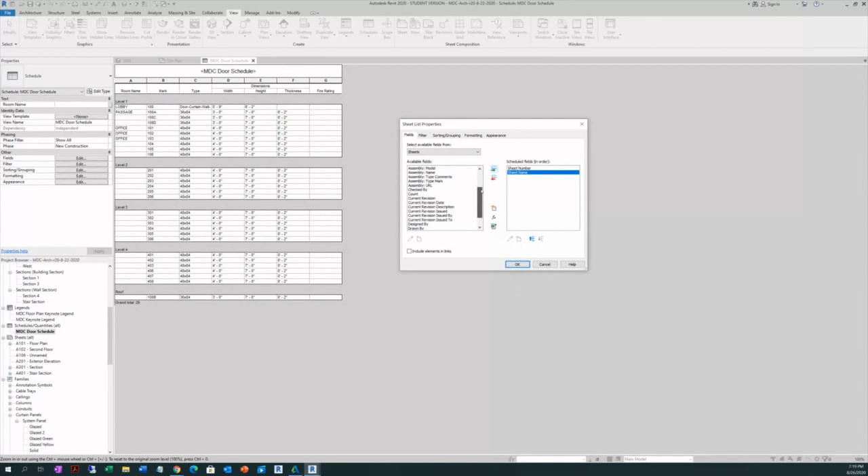For now, all these availables, I don't want to use. I want to create my parameter, my project parameter, okay? Now what I have, I'm going to click over here. So far we have this, correct, ladies? So far we have this, and that's what we have. You can increase this, the name, and have something like this. Are you with me on this?

Yes, okay, now look at here. I want you to save this. Okay, we have the sheet number and the sheet name. You can also change here the name, and you can put index of drawing, correct? Nothing happened. Now, let's say that you say, well, you know what, I need to have a complex index of drawings.

Let me open - no, I'm not going to open it, I'm going to keep it like that, simple. Let's say that we need to incorporate cover sheet, general notes. We need to also include the civil, life safety. We need to include also architectural, obviously, structural, and MEP - mechanical, electrical, and plumbing. And there are other ones that are not included, because you can have a pool consultant, interior designer, could be other disciplines, but let's keep it simple, right?

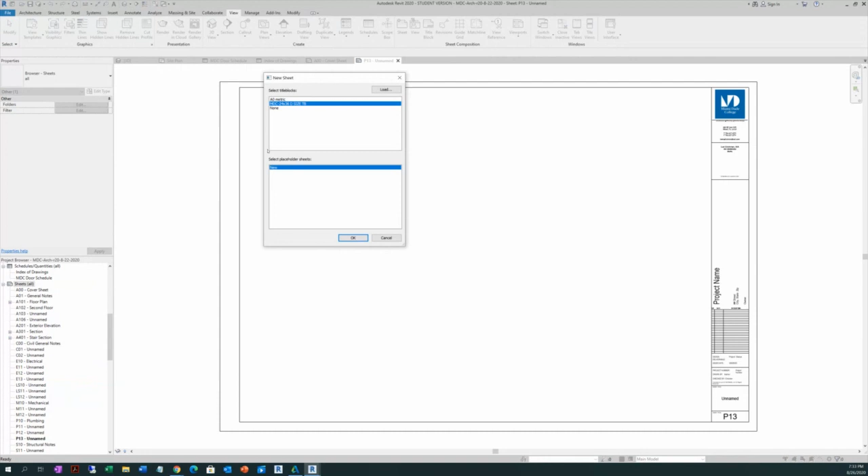What I need to do is this: I go ahead here in my project browser, correct? I can right click, new sheet. It's going to obviously get the last number that was done on the schedule, which is P something. I'm going to get here, correct? And it's going to ask me the title block. Yes, I say okay, but it's going to take me to P13, and that's not what I want, correct?

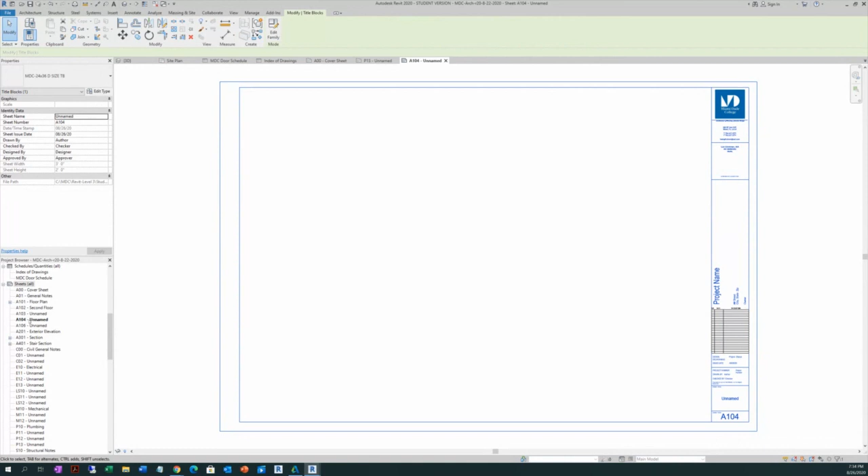So I come here, and then what I do is I click double on that sheet number, and I change it to A104. That's it. And then A104 will be here. Okay, now another situation I can approach is this.

You went here to, let's see, we were here, correct? Remember that we were here, correct? On your index of drawings? Yes. Then here you can come here, Haley and Rosa, insert data row. Yeah, but it's at the end.

The A104 that you create is at the end, it's not located in between on the index. Listen, you see on your project browser where it's located? Yes, it's located in the right position.

Okay, we are going to do the same here. Give me some time, give me some time that we are going to do it. Now, which sheet don't you have,

Rosa, that you said you are missing? A103, you don't have A103? Oh, okay, I have it here, okay. But I'm going to do it and check it out. Let me do this myself one second.

I don't have nothing there, I'm going to delete it. Okay, now perfect, I come back to my index of drawings, correct? Okay, you're in the index of drawings, what I want is to insert a data row again.

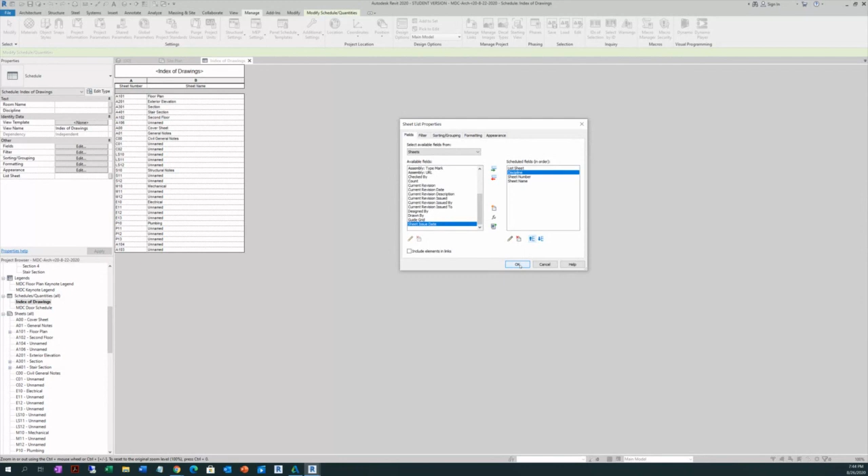Okay, now let's go here and click OK. This is what we have. Correct, ladies? Yes. That's okay.

Okay, so let's start with the sheet list. Who is coming first? Who is coming first will be the cover sheet and the general notes. So that will be over here, the A00 and the A01. So I go here and I look, and I'm going to enter 0. Then I'm going to enter 0 one more time in the other row, because it belongs to the cover sheet and general notes.

Then I'm going to, under discipline, I'm going to enter here, let's see, general. I'm going to enter general. Then I click away and I click again, and I can click and select general, okay? Because it's already typed in there for us to use. So far, so good, ladies?

Okay, now, after the cover sheet, comes the survey and all the description and all those things. But then also the civil, correct? So you locate where is the civil general notes, C00, C01. Then you are going to enter 1 and 1 for those civils, and there are 3 civil sheets. You have 3 civil sheets. Then under discipline, you are going to enter civil.

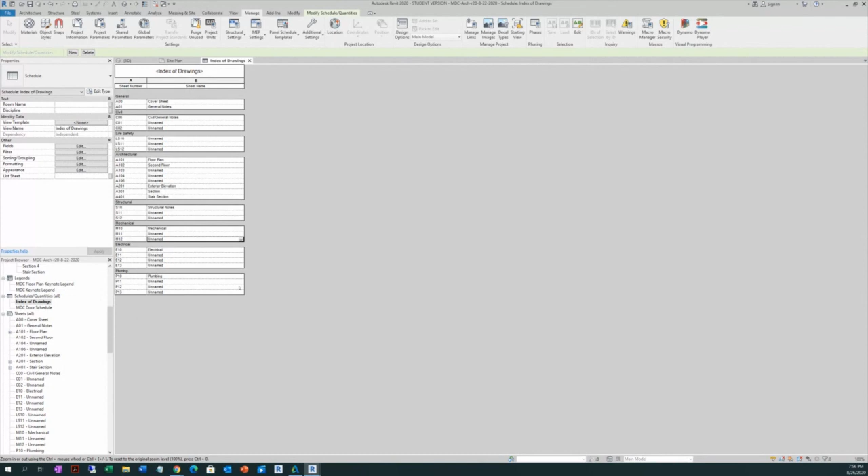If you want to enter a discipline, then you come here and sorting by grouping, by formatting, then you unhide it, sheet list and discipline, you work or you add whatever you need to add. Let's say that you need to add, tell me something, what discipline do you think that you need to add?

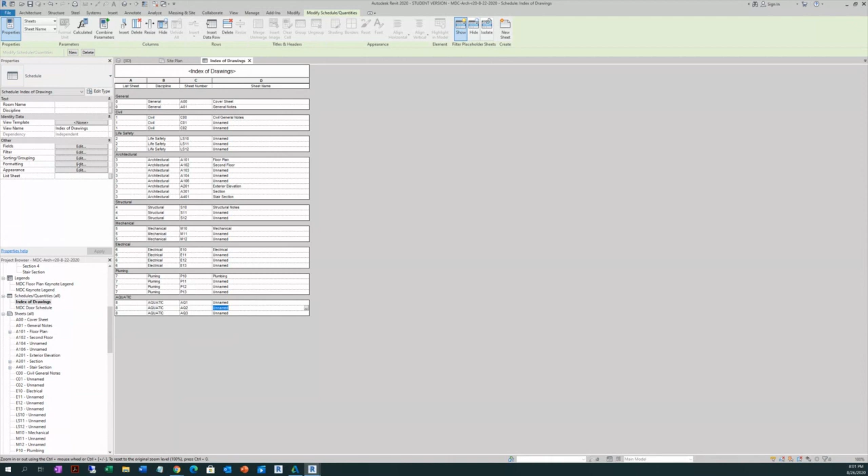Correct? Then you change the name of that sheet. It's AQ1, uppercase, AQ1, and then AQ2, which is the number of the sheet, AQ2, okay, and then AQ3, okay, that's it. Then one more time, you go here to formatting, you select sheet list, hidden field,

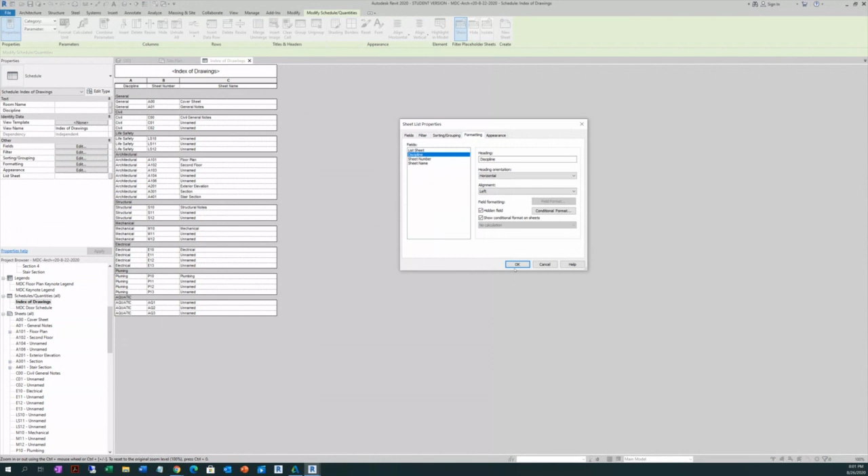you say okay, correct? Then you are going to do the same with discipline. Go back to formatting, select discipline and hidden field. And this is what you have. Okay, Haley? Rosa? Yes. Okay, so that could be a sheet index of drawings.

Now you can insert other fields, like for example, you have the fields here, edit fields. Then you can enter current revision. Let's see, current revision.

Then current date, current revision date. Okay, that's it, to keep it simple like that. Click over here. You have the current revision and the current revision date. It's always important with the dates. So you have something like that. You save it. Correct.

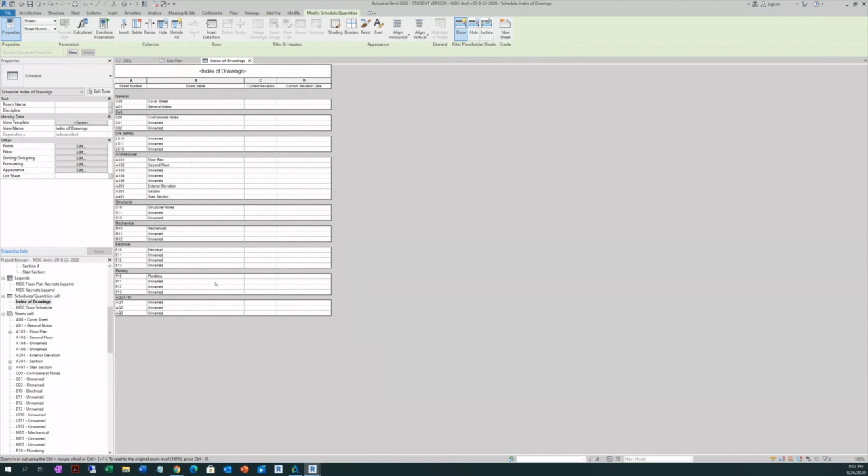Okay, now let's do something. Haley and Rosa, could you please share with me the index of drawings? I'm going to make moderator, participant, or presenter. Haley, I'm going to start with you, I have you here in the list. Presenter, please. Then Rosa. Let me turn down the lights in my house.

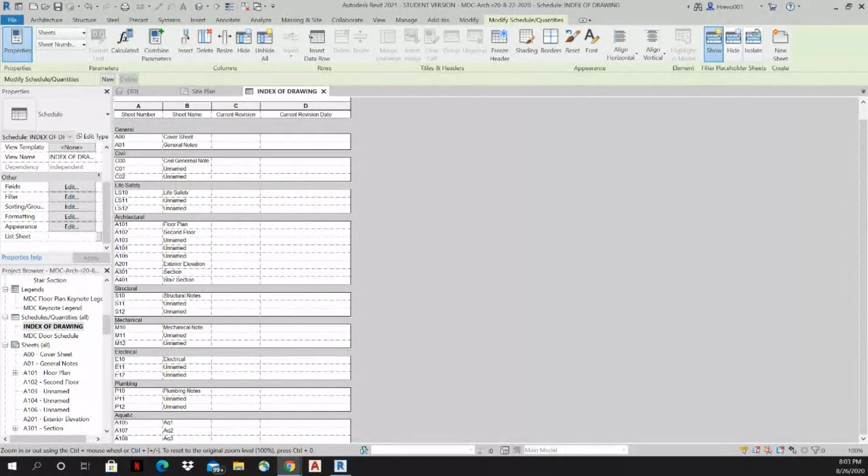Okay, let me see, Haley. Yeah, that's mine. Okay, wait, I want to see them. Okay excellent, see, save it and analyze it. Analyze it because that could be easy.

If you want, okay, we can insert, we can also insert the counting, because you want to know how many sheets you have in the project.

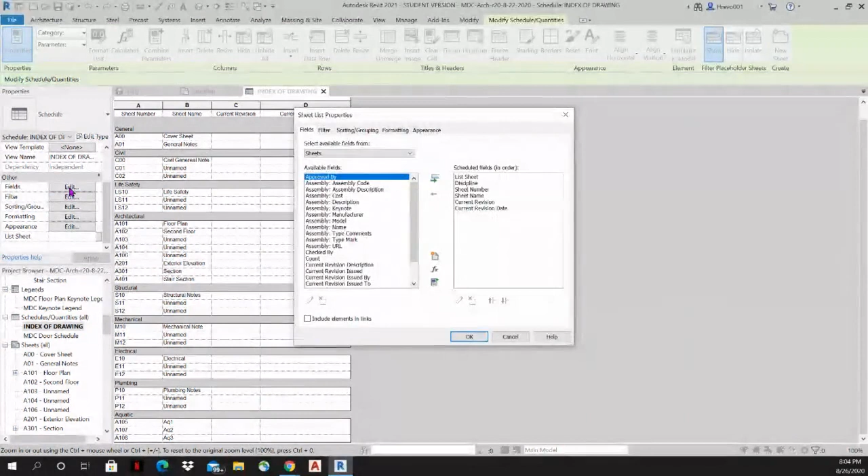You go back to the... Okay Haley, do me a favor, go to fields. And Rosa, go to fields. Click, go ahead, fields, click. Look over there, look for count. Yes, I'm going to do the same here. Look for count and enter count. Then you have count there, correct?

Now go back to fields, then go to sorting and grouping. In sorting and grouping I want you to check the itemize every instance, but click on grand totals. Grand totals. Okay, oh beautiful, and say okay, perfect.

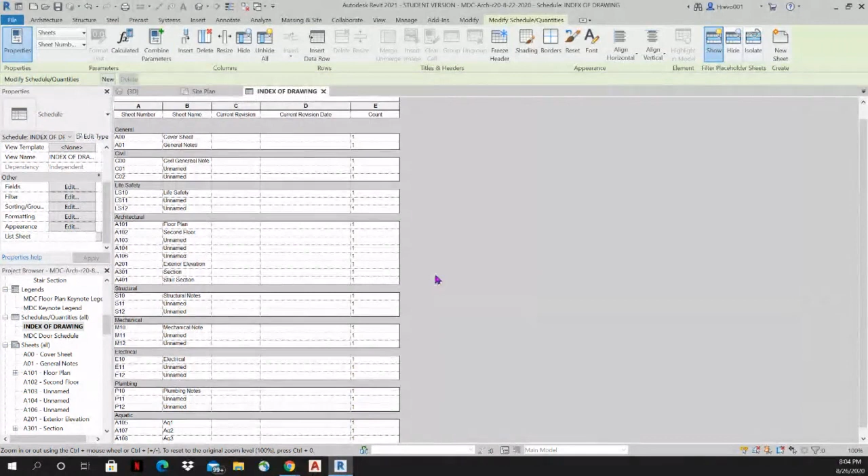So you have something like that. Now you see what the E column says? You see the E column? It says count, highlighted there. See, select E, drag it, the whole column. Excellent, and then try hitting on your ribbon, on your right side upper, which says show next to, hit it.

It should hit it. I don't want to see it, I don't want to hit it. Okay, oh no, go to the columns. I'm sorry, I apologize, on the left side. No, on the ribbon, on the left side, go to the right a little, hit it. No, the next one. Got it, hide column. You're doing the same that you did on formatting, the same as when you hit the list sheet for the discipline, the same you did it there, okay? But you have the counting now, okay.

Okay, thank you. Rosa, may you please show me what you have, please?

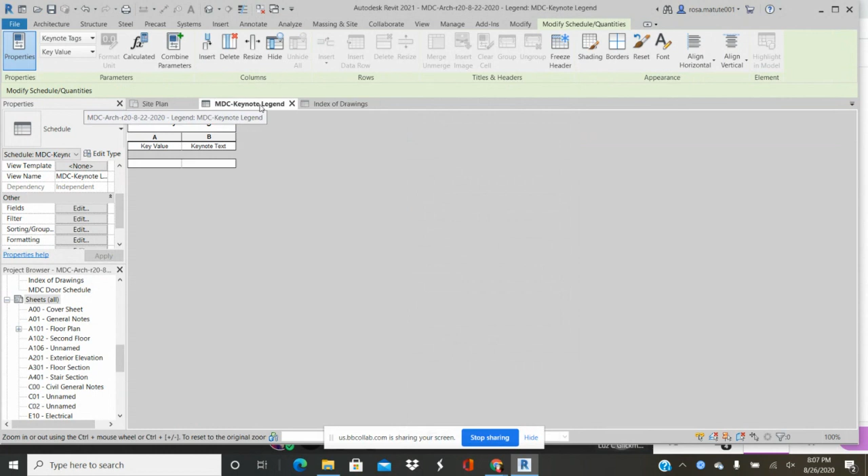Now let's do something quickly. Excuse me, Luz, please, if we have time at the end, remember that I couldn't do the keynote legend. Okay, I don't know why you cannot do it, but let's do something, Rosa.

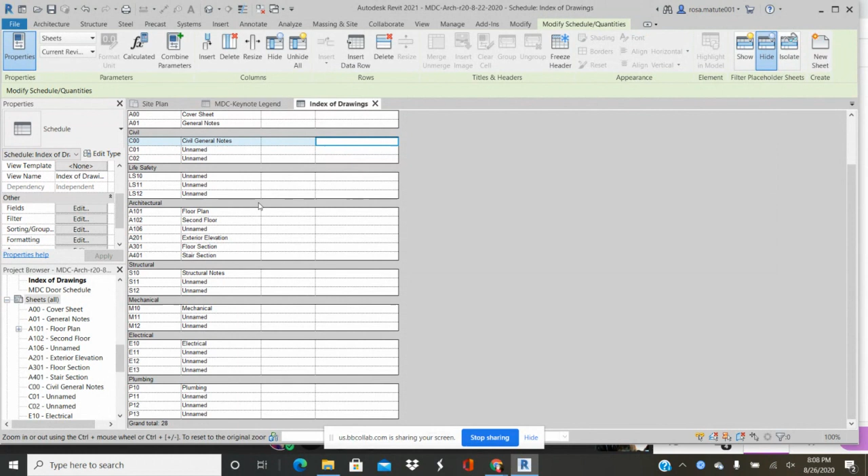I don't know if you have time, let's say, let's see, on Friday, at least one hour, or tomorrow, to go and see for the... let me see, let me go back and share. I know that you cannot, let's see, and if Haley can join us.

What I can do, let's do something. Next Wednesday we can recap whatever is included in the keynotes. Perfect, perfect, okay, for me it's perfect. If not Wednesday, let's do it for Tuesday. That's it, on Tuesday we can recap, that's the last class, then we can address that.

I'm going to send you a quick floor plan, two floor plan, two story, along with Haley. Have those notes ready, but I'm going to show you how you can do it using the notepad, the keynoting, okay? Because there's another way to do it with Excel sheets, and you bring it, but then you need to bring it to a CAD, and then you link the CAD file. Let's do it this way, I think it's better, okay? So let's continue, and Tuesday at this time make yourself available and we can go over the keynote, because I don't know why you cannot do the keynote.

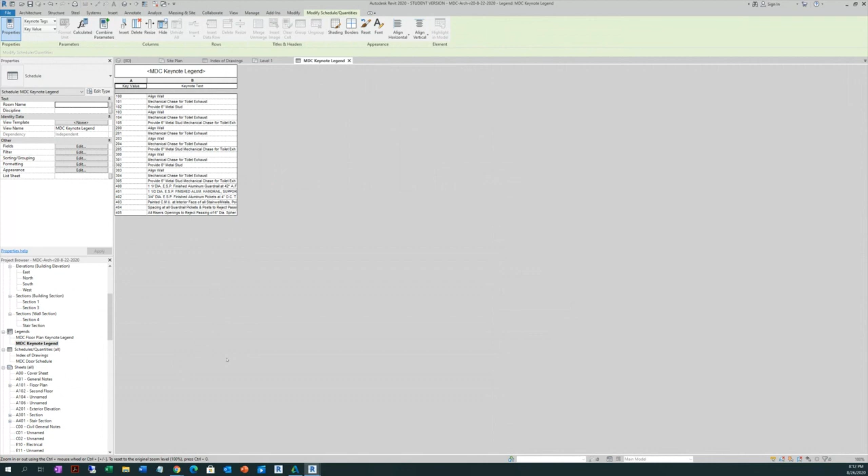Yes, without... yes, the keynote. Yes, but you have it now, but you didn't have it that day, correct? Correct. Okay, but let's be fair, let's go be fair.

Let's go do it on Tuesday, because I don't want to give you an easy task, because I know that you did it, but for some reason you were having the tags, but the schedule was not populated over here, correct? So if something's wrong there, let's go do it from scratch, okay? We are going to do it on Tuesday, okay?

So for me to explain to Haley and to you quickly how the use of the keynotes works: when you go to Notepad, to the Notepad, do this, and then bring it to your project, okay? So let's go, continue here.

On level 1, I want you to go back and level 1. In level 1, I want you to highlight it, right click, and say duplicate, but duplicate with detailing. Okay, do duplicate alone, duplicate view, duplicate alone. See, you don't have no notes, you don't have no tags, you don't have no dimensions.

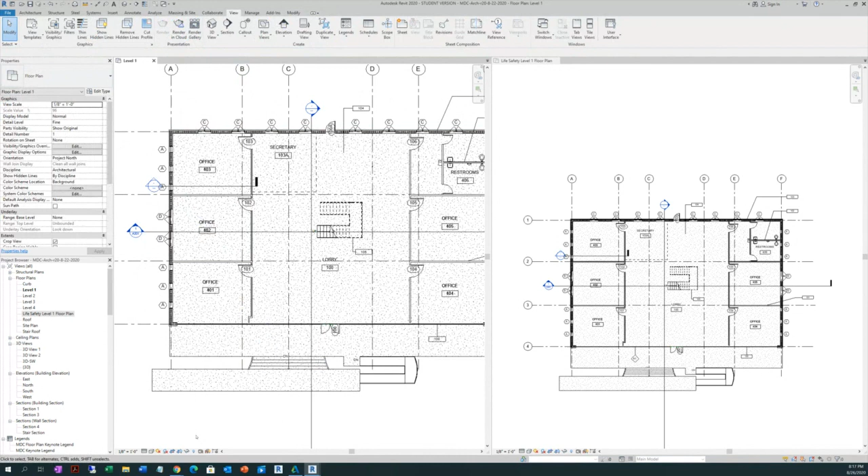Now you have your level 1 alone. Now you don't need to repeat. If I have my tags here, that's perfect. If I have my window tags and my door tag, beautiful. My room, eventually, of course. Then I'm going to delete. I'm going to delete from this level 1 only my wall types. I'm going to select this, the A1, and I'm going to delete it from there. I'm going to leave this alone. I should have my dimensions here, correct? Because this could be the dimension floor plan. Actually, this is the dimension floor plan.

Okay, so you come here on your new life safety level 1 floor plan. You come here on the life safety level floor plan, correct? Here you delete the tag one and then? That's it, okay, on your level 1, correct. Okay, what I'm insisting on this, Kaylee and Rosa, is because you show only one time the information. In this case over here, correct? Over here, I'm sorry, the window tag or the door tags.

So over here, you are going to only show what is life safety pertaining, what it belongs to life safety. That's it. So what you need to do in life safety level 1, select one of the window tags, right click. You are going to select all the instance in the view, not in the project, because if you select the project, it's going to select included here on level 1. You are going to select all instance visible in view, and this view where you are, life safety. Capiche? Everybody with me? Yeah, perfect. So you are going to delete it. Correct? Okay, so you don't need to show things twice because then you have to go and fix it.

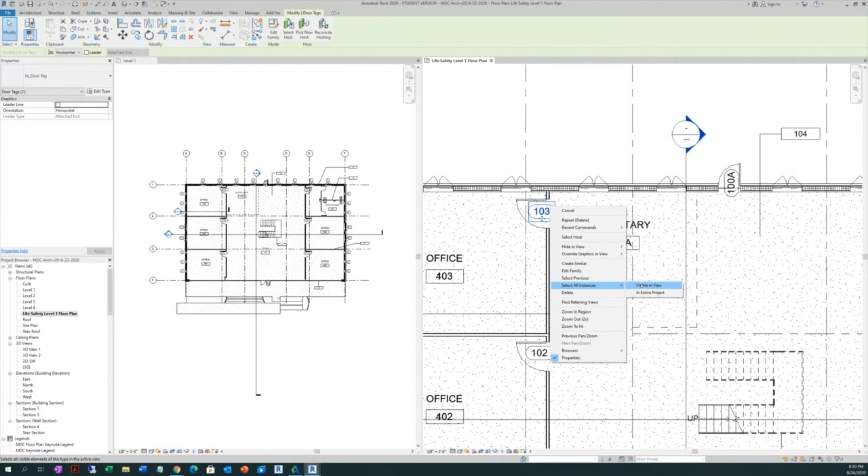Then you don't need either to show the door numbers. Select your door numbers. Make sure it's the door numbers tag. Right click, select all the instance visible in the view or in the project. Who can help me on that? Who can help me? It's going to be the view. Beautiful, excellent, I love it.

So you delete it. You have your doors number here, your window tag in there. You don't need to do it twice. You don't even need to hit it here. Don't do it, you don't need it. Honestly, don't hit it. You have it here, you have it here, but don't hit it here if you don't need it. Because somebody can do something, then the person doesn't know, it's going to populate this with that, no.

This is what it is. Okay, now let's say that we don't need even the tag. Select one of the tags, right click, select all the instance visible in the view and delete it. Okay?

Even the sections, but okay, let's leave it the sections. You can go ahead, right click, hide in view the element. Select the other section, click, hide in view the element. Why? If I come here, let's say I'm going to select this section and delete it, it's going to complain.

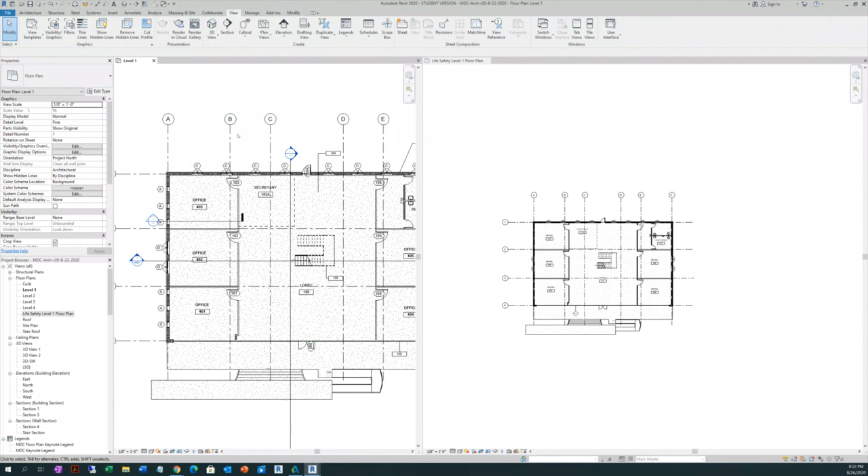Okay, now I have this, and let's go have some fun. I'm going to close level 1, and I'm going to teach you something. Okay, now we are on the life safety level 1 floor plan, correct? Okay, now

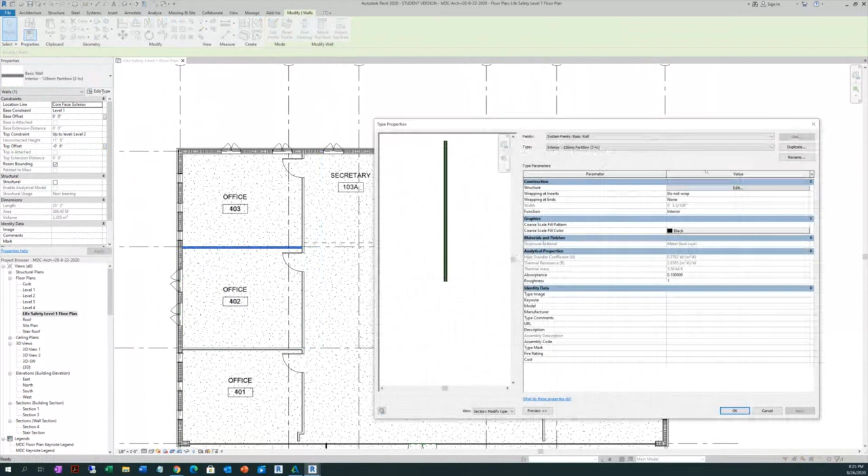Wait. Okay, select that one. So over here in edit type, I want to be consistent on my naming. So I'm going to duplicate, and I'm going to put here, let's say, MDC or 6 inches, space MDC, 2 hours. Okay, 2 hours, let's say 2 hours.

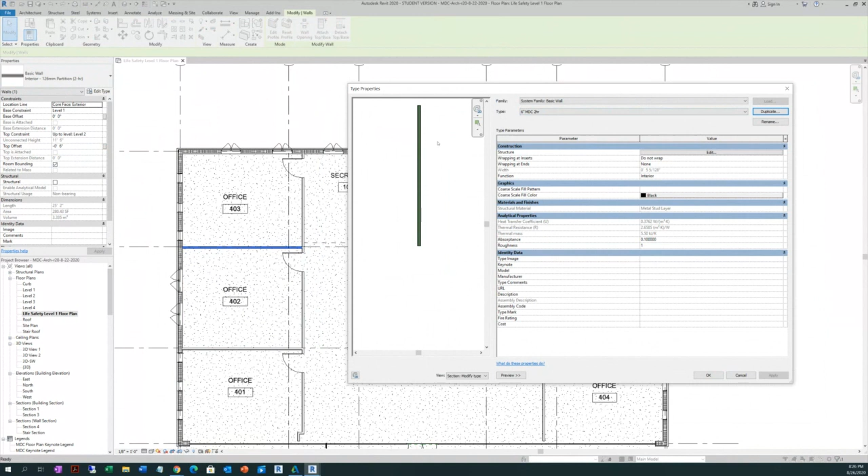Excuse me, Luz. I have a warning message here. But it lets you do it. Yes, okay. Leave it like that. So put - let's go put this 6 inches MDC 2 hours. Okay, or let's do it right. Let's do things properly. Forget it, let's cancel what we just did. Let's do things right.

Let's go do something. This wall and this wall is going to be 2 hour rating, period. What I'm going to do is, if I select this wall, I'm going to split it. Let's go do it quickly. Come here to modify. Let's go here and modify, then select split element.

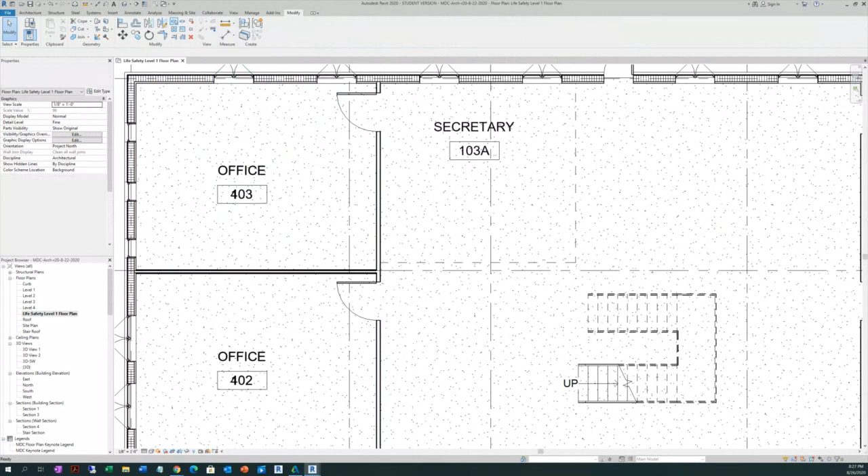Position yourself over here at this intersection between that vertical wall and the horizontal wall. Clear? Okay, so you have 2 walls there, correct? You have 2 walls there, right, ladies? 2 walls there. So let's go. Is everybody with me here?

Yes. Okay, Haley? Yes, yes, okay. We are going to create an 8 inches CMU wall here, period. That's it. How? Let's go here on architecture, let's go and wall. And wall, you go to the type selector and let's go locate the basic generic 8 inches MDC. You see here, wall generic 8 inches MDC. Click on that one.

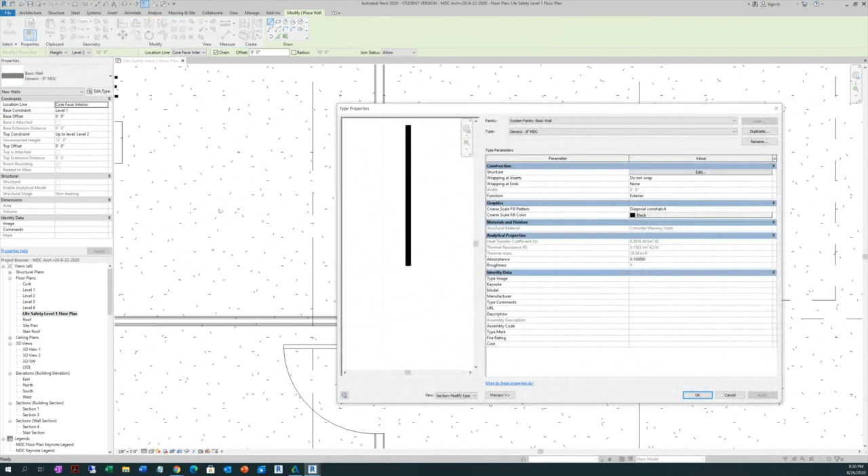Basic wall generic 8 inches MDC. Select edit type. Duplicate, and you are going to call this - remove the generic word, you are going to leave 8 inches MDC CMU 2 HR, 2 hours, okay, 2 hours, 8 inches MDC CMU space number 2 lowercase h r, and you say okay.

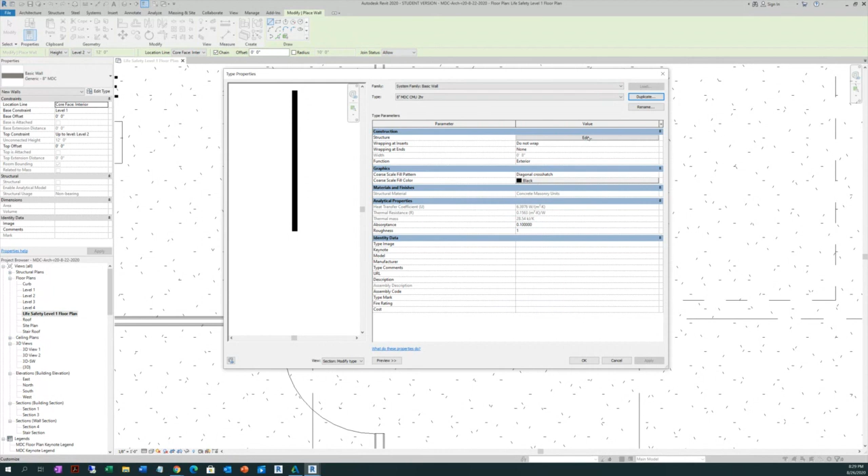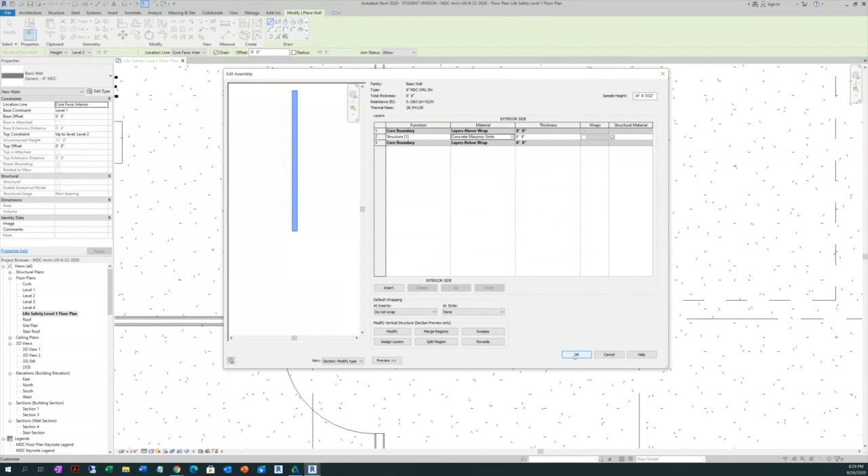You don't compromise the wall that you selected first. Then here, what I want you to do, go to the structure of the edit assembly, click on the material. You will have this, correct? You will have this. Whatever you have here, that's okay. That's perfect.

Okay? Now, what we need to do is go ahead. You say okay, here and identity data, you are going to look for fire rating. You are going to look for fire rating and you are going to enter. This is very important, ladies. Whatever you are going to enter here is going to be checked on the filter. I'm going to teach you how to use at least a filter concept using wall ratings. So the naming - whatever naming you are using, uppercase, lowercase, space, uppercase, lowercase - you need to be consistent, okay?

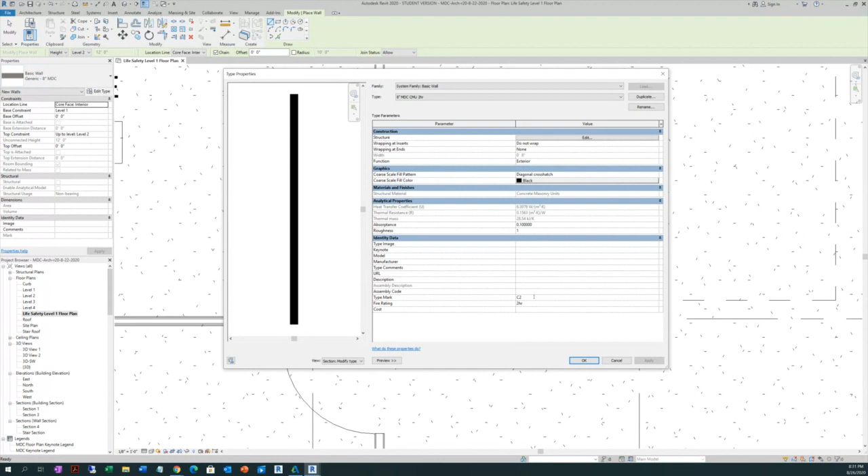So for fire rating, you are going to enter number 2, lowercase h, lowercase r. You can use uppercase H, uppercase R, but then you have to know that and use it consistently later on the filter, okay? So everything matches. You say okay, no problem, that's my wall. Oh, and the tag - I want you to use type mark. Yes, you are going to use a type mark for this, and it's going to be C, let's say C, dash - I'm sorry - C as in Charlie, 2. Let's see, C like CMU and 2 because it's 2 hours.

Let's see, okay. Now just draw that wall, a little segment of that wall here. Nothing happened, so you say, there's the wall. You have the wall there already done. You have that wall there, ladies. Yes. Yes, Haley. Yes. Yes, Haley. Yes, yes, okay. Okay, perfect. Now look at here.

You are going to select this wall. Then scroll down, press Control on your keyboard and select this wall as well. Then go to your type selector and select basic wall 8 inches, MDC CMU, 2 hours. And this is what you're going to have.

Delete the other wall that you have here. So you have this CMU wall there. Let's say that for some reason we are going to call this a mechanical room, or it could be a storage room, depending on what you are going to store. Let's go with storage room, storage room, high, hazardous, dangerous materials.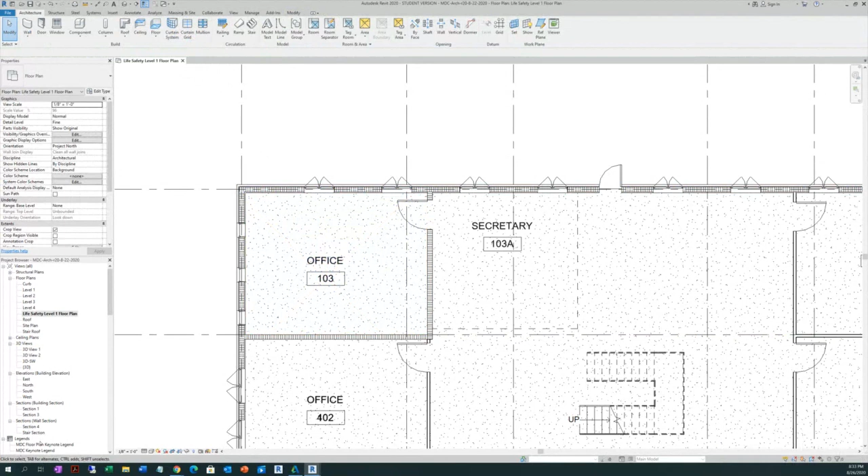Okay, so I have something wrong here, and I just noticed that. Let's see this as well. Why do I have like a room boundary? Okay, I have to remove everything that says 4.

Let's go click on what says 4. Delete that, I apologize, delete it, because we only have the first floor here. We should not have anything with 4 here. No 4, delete that tag, delete it. That was the message that Rosa probably mentioned.

As well here on the room, on the restroom, let's go here. We need to have only one, 106, I apologize, 106, that's it. We don't need 4s here. Let's go select this, remove, and delete that 4.

And as well this, the last one. Let me see. Delete that one as well, and that's it. So in recap, we have the 100 numbers for the life safety first floor plan.

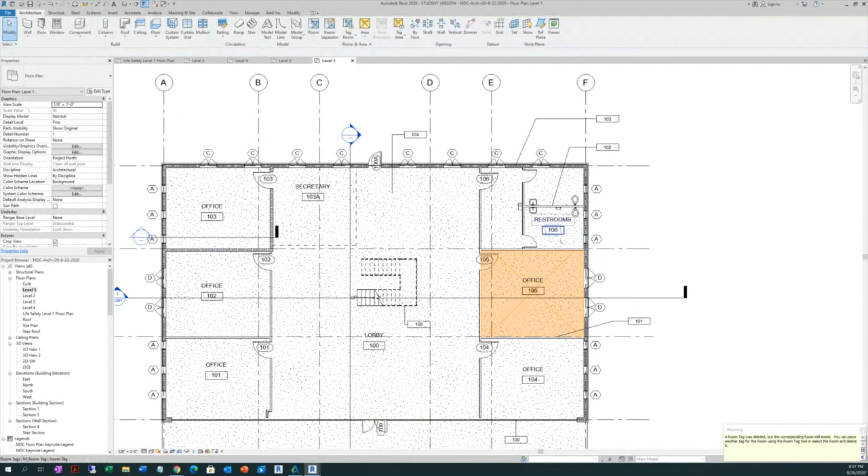So, okay, let's go then here. But well, this is already removed. Give me 1 second, delete it and save it, and delete it, so we don't have double counts, because this is going to reflect then in the schedules. If we leave it like that, that could be reflecting in the schedule.

So, to recap, Haley, do you have the life safety floor plan with the 100? Yes, I have to delete it, but I have it now. Okay, now also go and check your project later on.

And look at what, ay wait, over here like in level 1, also you have to be careful, it needs to be 100 numbers. Okay, now go back to life safety. This is where the issue is.

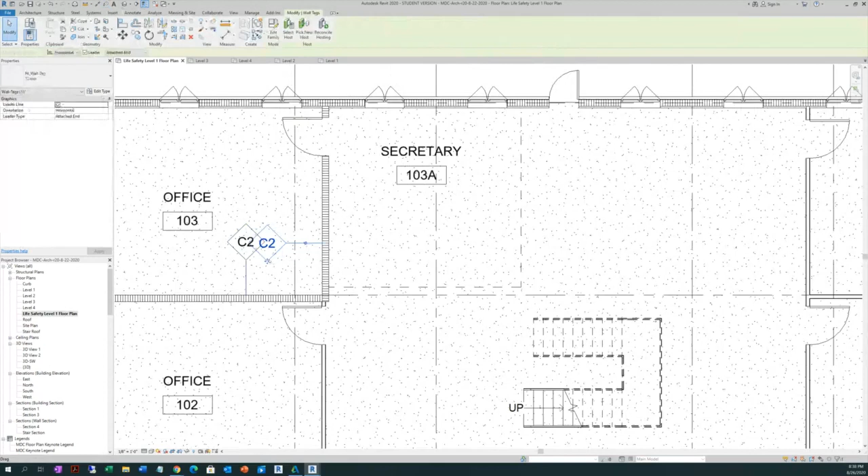So you have this wall, and this wall. If you come here on the Annotate tab, and then come to tag by category, click on tag by category, and then it's going to be C2, correct? C2. If you want to do it like this, horizontal, C2, and you want to do it something like this - the only way I can approach this is like this. At least if you want to have it with two tags and arrows, I don't see it - the program doesn't have two tag arrows yet.

So, but you can have something like that. You select your tag, and you know, edit type. You go here and leader arrow, you click on that, and heavy end. You can select the heavy end over here - beautiful, heavy end. You make sure there is a heavy end.

When you print it out, remember the thin line needs to be off in order for you to see the thickness of your walls. Now here, I'm not going to go into that, that will be for the join. It needs to be joined, it needs to be crisp. This joint needs to be one with the other one.

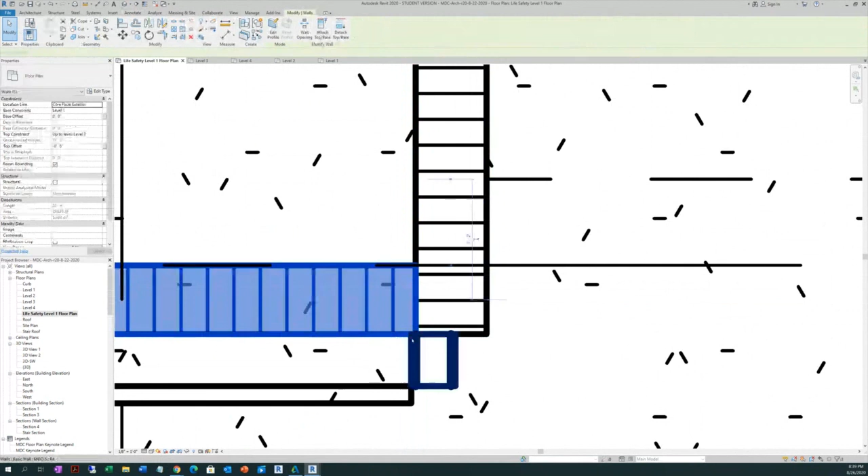But at this moment, what I want to accomplish - let's see if we can fillet this - go to modify, trim extend, this with this, let's see.

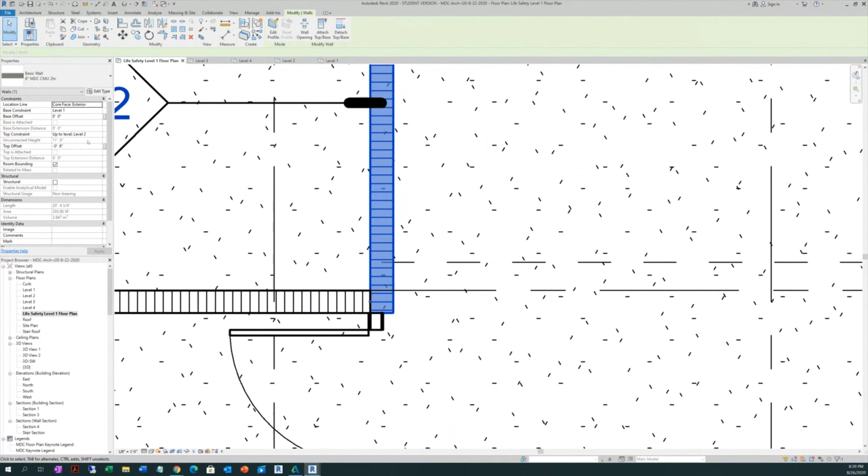Ok, it's not letting me. Possibly the height of one of these isn't allowing it, but let me see. 1 to 2, -6, and this one is 1 to 2, it looks the same. But let's go ahead and leave it like that, because the important thing is coming now.

Now, you have this 2 hours, and then you are going to have this over here, all this here, all this.

Let's go, select this wall here, MDC 5, edit, duplicate here, and it's going to be MDC 5, 1 hour. Let's see, which wall did you select?

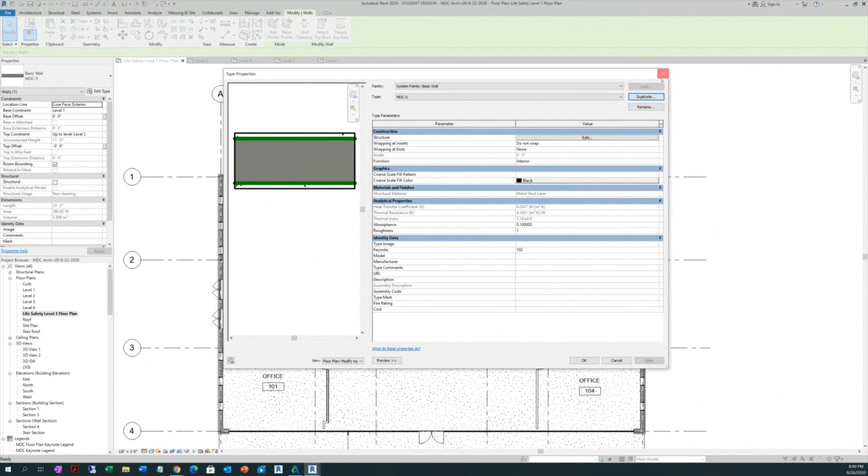Okay, I'm going to repeat. Give me 1 second, sorry. Yes, select this wall. Okay, so you can select that wall and press down and select the other wall here, this and this wall, this wall and that little bundle over there.

Okay, all that wall, okay, press Control down. Then you come here to the edit type, then you come and duplicate. And then you are going to put this wall 6 inches, MDC 6 inches, space 1, lowercase h,

R. Okay, MDC space 6 for 6 inches, space 1 HR, HR lowercase, that's it.

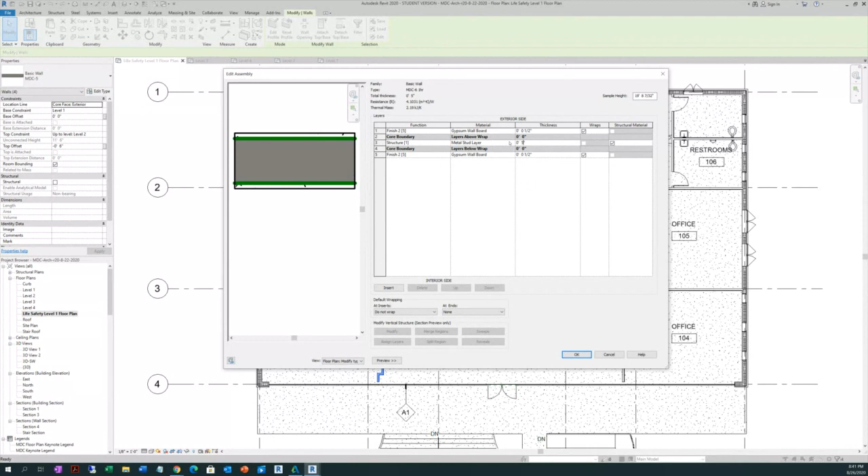Then on the structural and the assembly, click on that, and instead of having 5, we are going to have 6. So on the structural and metal stud layer, enter 5 inches. On layer 3, structural, metal stud layer, 5 inches.

Then you say okay. Then on the type mark you are going to enter, we already have C, let's go enter, I'm sorry, B1. B1 is a type mark for the wall.

Then the fire rating, I want you to enter 1 lowercase h, lowercase r, 1 hour. Okay, because we have 2 hours and 1 hour, correct?

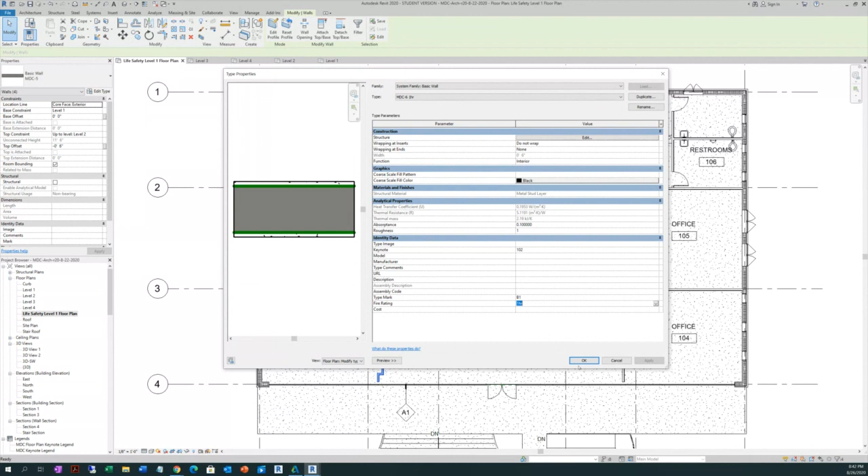Then you say okay. Then that wall is 6 inches, okay? 1 hour, okay? Now let's go again.

You can go ahead and annotate, tag by category, or you can select this tag, right click. Remember the right click gives you a menu, create similar, and you come here on your wall that you just modified, then create another one, then cancel twice, correct?

Then move this, if you please, over here to align with this, okay, one on top of the other, in order to have something like that, if you want to, okay? Oh, you can have it over here too, because still the wall is on top of the door, correct?

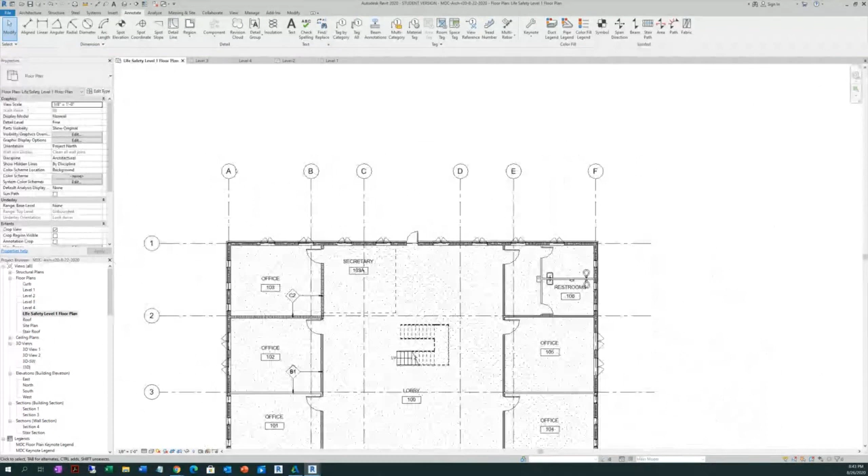Now, here, what we are going to do, we are going to create a filter, okay? So where are we going to create the filter?

Is everybody here with me? Haley and Rosa? Hello? Yes, I'm here. And Rosa and Haley? Yes, Haley? Okay, now let's go create a filter.

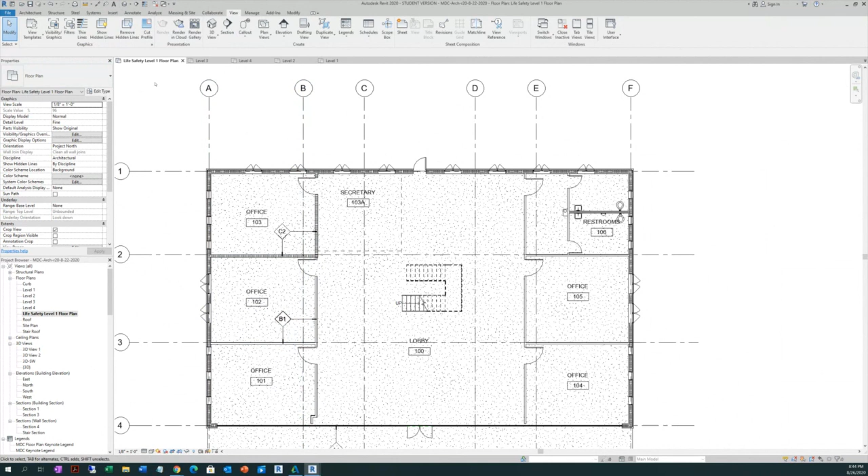Now, where do we go to create the filter? View, select filter. I'm sorry, select view. Let's go for filter. We need to create a filter, correct? So look for the creation of a filter, view, then create a select filter here, okay?

So over here, guys, you are on this dialog. In this dialog, you are going to create a 1 hour rating and 2 hour rating, a filter for your walls.

So how? You see here this little icon on your left lower section, click on that. See, filter name. Then you are going to put exactly what you did first, 2HR. Leave it like that, 2HR. Okay, and then you say okay.

Then where are you going to place that filter? Where are you going to place that filter? Let me shut off the light so he doesn't see the cat outside. I'm sorry.

No te voy a dar ninguna cookie. No te voy a dar ninguna cookie.

Okay, so you are Luz, can you find the filter tab on view? Okay, yeah, I got it. Remember that's not the filter when you select. This is the filter for the view, visibility graphics that you are going to show on this view. So you select the filter, okay?

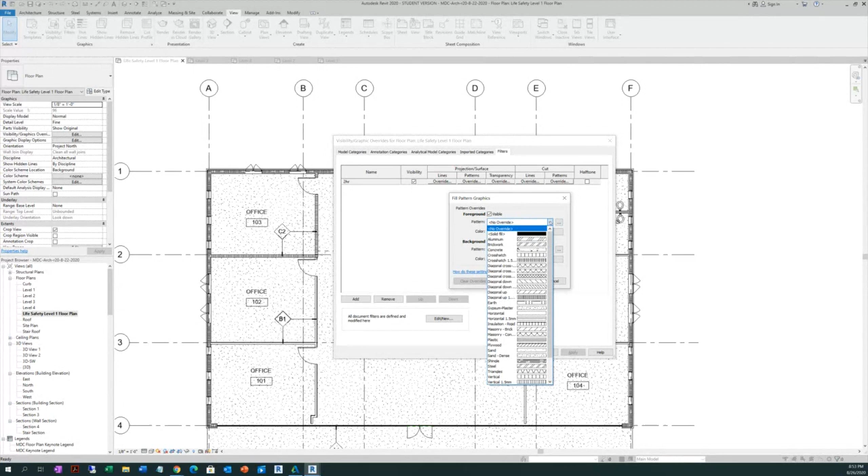Check on. You are going to come here where it says pattern, click on that, but that's not the pattern we are going to use, correct? Because it's not downloaded yet. You are going to click on the two things you have here, the 3 dots here, click on that, correct?

Then we are going to bring a pattern, correct? Let's go see, is this a new fill pattern? See here, same situation, a new fill pattern. Click over here, please.

Okay, so over here you see it says basic, click on custom. Please click on custom. Okay, and custom, that's why we need to go browse for the pattern I sent you this morning or this afternoon. Click on browse.

Then let's go locate the pattern. Oh, I don't know where you downloaded it on your computer. Try to look for it, please. Let me see.

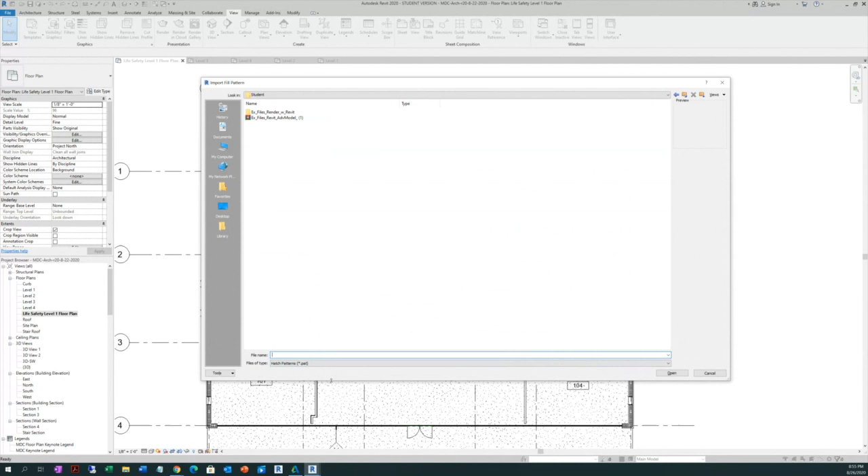Let's see, its extension is General 2HR. Yeah, you have it there? Yes. Okay, wait, let me check mine. Rosa, if you don't see it, or Haley, anytime you don't see the file extension that you're looking for but you know it's there, put asterisk, point asterisk, it will show you all those files with different extensions.

So let me see because I don't have it here, but I know I have it on the other ones. It should have it here. Well, don't worry, I'm going to look for the MDC level 1, and it should be... oh my god, wait, give me one second. It should be, give me one second. No, that's not it.

Okay, yes, select general 2HR. Okay. Rosa, you have this, and Haley, you have this? Yes. Okay, yes, now leave alone whatever setting is here.

Then the only thing is here, orientation in host layers. Click on that and select align with the element, because if you leave it oriented to view, when you do it vertical or versus, it's going to do it one way - it's going to look like it's horizontal. Let's put it that way. So if you select align with elements, it's going to work even if you're doing horizontal or vertical lines. It goes with that, right?

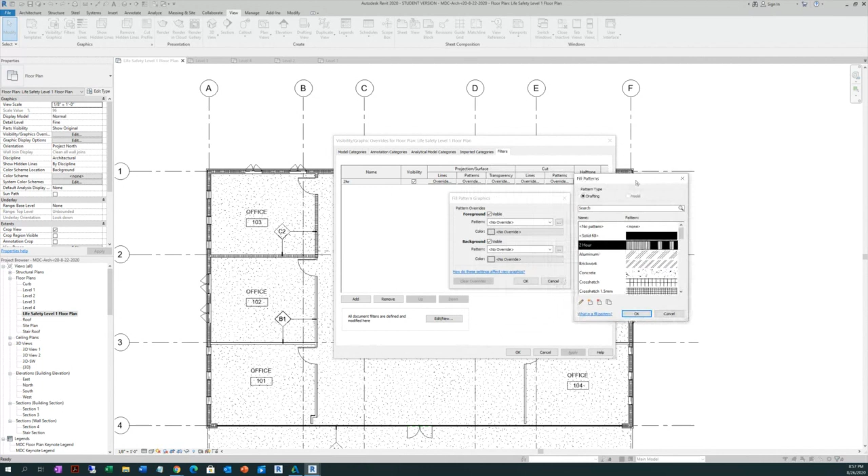Okay, so you say, okay, that's 2 hours, but then you want to have a color on that. You say, okay, here on foreground color, click on that button, you are going to enter, let's say, yellow - yellow color for that. Okay, and you say okay here, and then you say okay here.

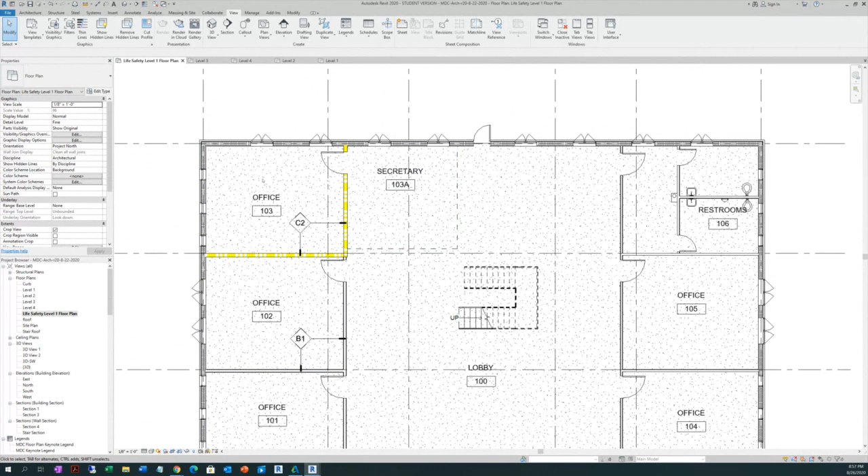And then you should have something like that. Okay, who doesn't have it like that? Haley, you have it? Yes, I have it. And how about Rosa? I have it too. Okay, perfect.

So I want you to keep that in mind. When you are going to use this procedure in another project, what you may have to have is the pattern, and to do your filter in that project. This, you cannot transfer like project to project. No, you need to have the pattern. It's the most it can go with, okay?

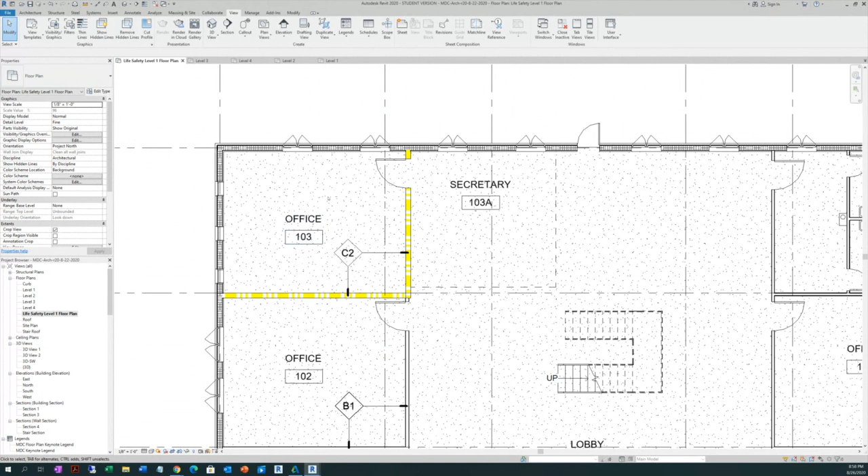So let's give it a try for the 1 hour here. Let's go do the same thing. So you go to view, you create your filter, correct? Filter, correct, now here, one more time. And this dialog says new to create the filter, okay? Then the name of that filter is going to be 1HR. 1HR, then you say okay.

1HR, where are you going to apply that? It's going to be applied to your walls. Then walls here, click next to walls. What are you going to apply that filter on? On that wall, on the fire rating, you have it here. Then you are going to place over here equals, because this is the filter, equals. Then you are going to enter here 1 hour, correct?

I create my filter, I apply it to the category I need to, I put the rules on my filter - walls, where in the wall, and the fire rating - the filter itself equals my 1HR. It's going to look for this. Then you say okay - nothing happened.

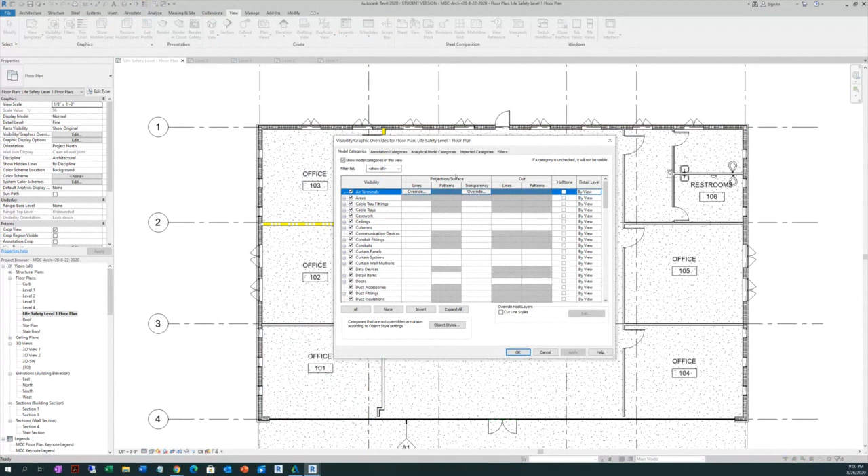So here you come to visibility graphics, and visibility graphics, you go again to filters, and filter, you come and add - see your filter is there, 1HR, you say okay.

Then the same situation, let me get up because...

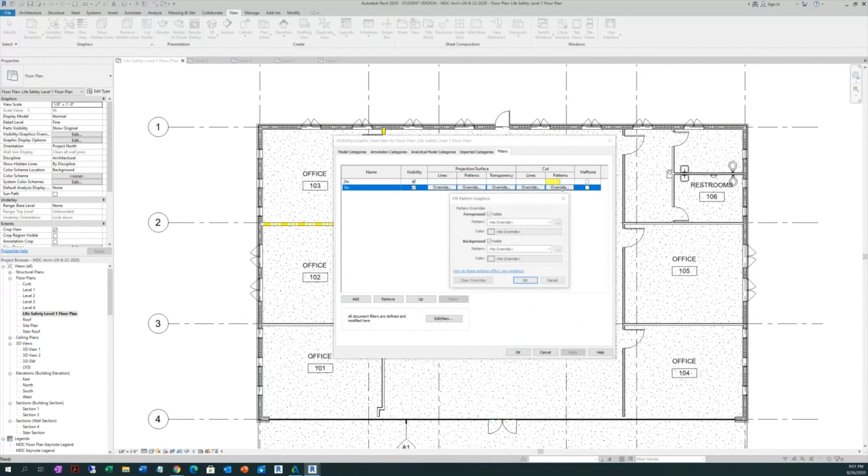So here in 1HR, look for the cutting section, click under patterns, click on overrides, then on foreground and pattern, click what says no override, click on that. Obviously, we don't have that pattern there.

Then you go in browser on the 3 points, click on that. Okay, and then you are going to create a new pattern, correct? It's a drafting pattern. Say new fill pattern, click on here. Then come to what says custom, because it's a custom. You are going to bring it.

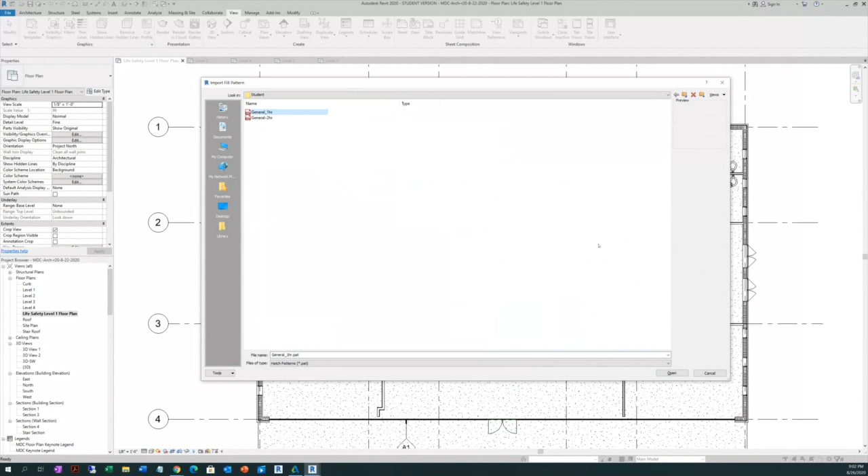Click over here where it says browse. Select the 1 hour. Open. The same orientation to the host layers is going to be aligned with the element. Align with the element. Then say OK. Then apply a color.

The color will be red. Select OK here.

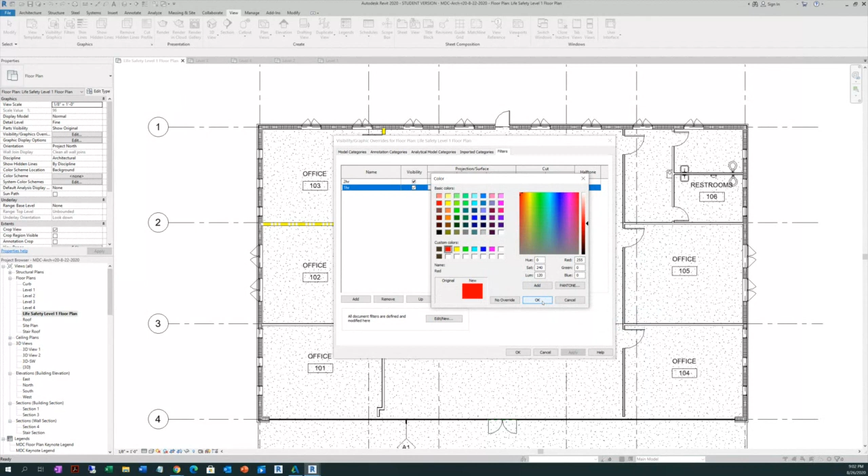What is the difference between the colors yellow and red? Well, I used to work for healthcare, doing projects for hospitals, and AHCA is the agency who administrates for the hospitals and clinics. They request to identify a 2 hour rating as yellow and 1 hour as red, and could be, let's say, different for a smoke barrier too, could be blue. But with this example, that will be enough for you guys to have the concept.

So, okay here, then you say okay. Now what happened here? The scale, see? Because if I apply this filter into an 8 inch wall, that will not happen. So sometimes this happens. Well, the only approach I can have is to change the scale.

So where we go to do that is on the filter, go to the filter, I'm sorry, to the visibility graphics. Go to visibility graphics and filters. Click over here where it says cut pattern. Click over here.

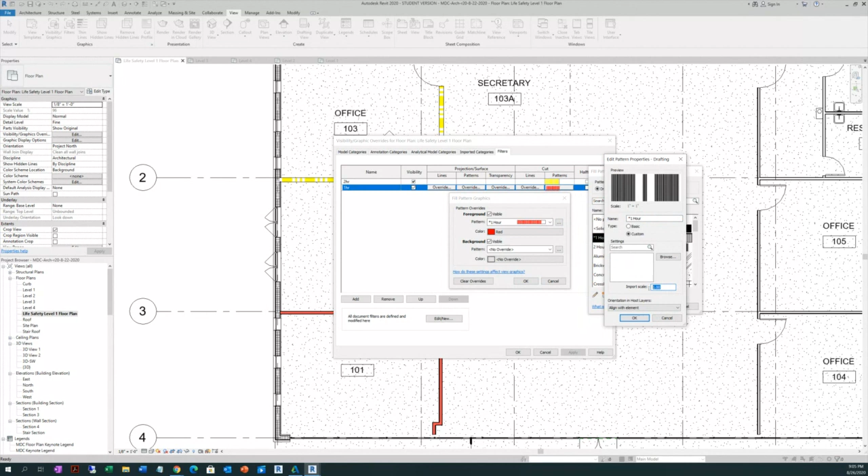Let's see if we can work. You see the import scale. Import scale is 1. Let's go see if we can work with maybe, I don't know, maybe 6. Okay, let's work with 6. Apply. Let me see what happened.

That works something weird. Okay, let's go back to the visibility graphics, go back with the filter, where the filter is the cut pattern. Go back to the 3 points to locate the settings. Then make sure 1 hour is highlighted. Select the little pencil.

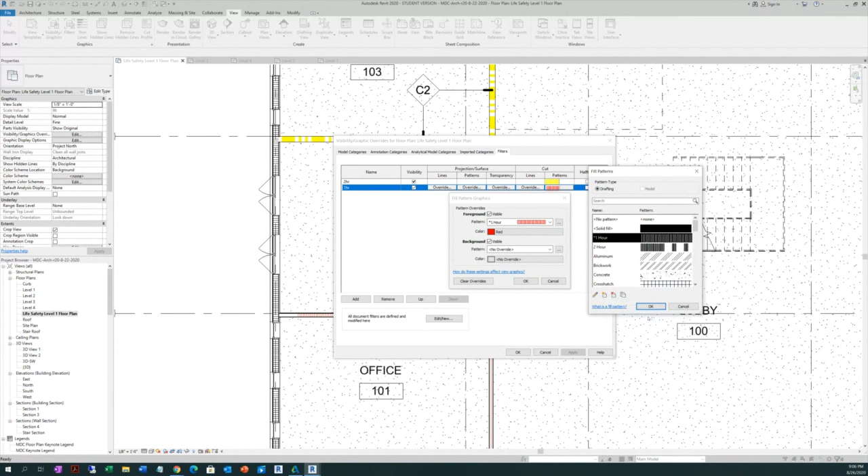Come here where it says import scale. I don't know, maybe it will work with 12. Let's see, that happened one time to me. Okay, and see if that works now.

Well, it works weird. Let's give it one last try, because I'm sure if I apply this to the 8 inch wall, that will not behave. So let's go back one more time: visibility graphics, go to filter, cut patterns, click on that, click on the 3 points, make sure 1H is highlighted, edit pattern, import scale.

Let's see if we can even align. Select here and let's put what? Let me see, 0.5. I'm not sure if it will work. Okay, no. Now the scale should be more than 1.

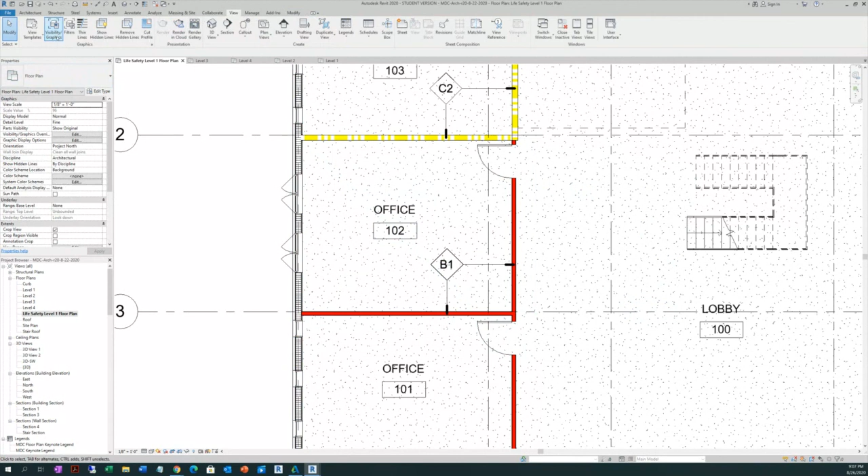So let's see for the last time. Select one more time. Go. I'm sorry, filter, visibility graphics, go to filter, cut pattern, click again, click on the 3 points, make sure it's 1 hour selected, edit pattern.

Over here let's go put 1.5. Not sure if that works. See, I'm seeing it here. I'm not sure if that works. Let's see. No.

So we can do it as an 8 inch wall, but over here we need to play with the scale, but the concept is there. Okay, I can do it in 8 inch wall. I don't want to hold the class just because of that. We can go back to this, let's say on Tuesday, okay, because I know if I make it, that happened one time, but I worked on the scale, okay?

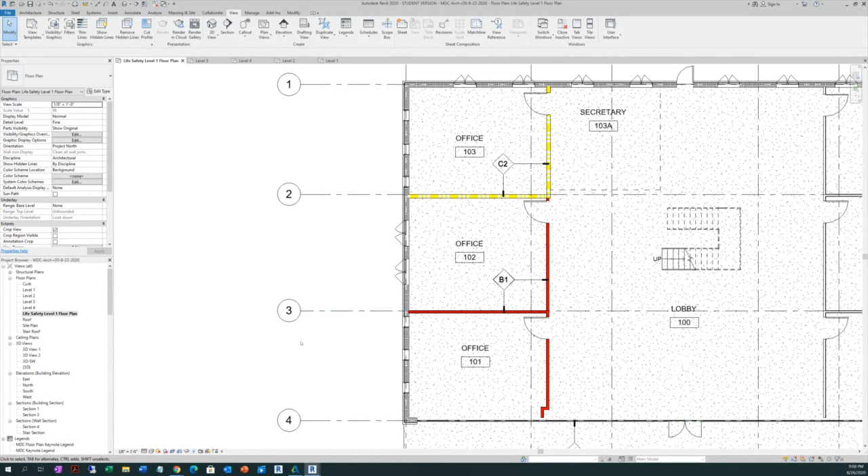But do you understand the concept to create a filter, ladies? Hello? Yes, I do. Okay, and Haley, Haley, okay, are you there? Okay, now, so we have this.

Now let's go here on the site plan to create the site plan. After creating the site plan, then we can start working on the renderings and then a walkthrough. To have for Saturday the creating form and massing and some conceptual massing and group, and also the work sharing, which is included for the central, how you can create the central file and local, to have that idea how you can, when you go to the office, go ahead and do your own local user file.

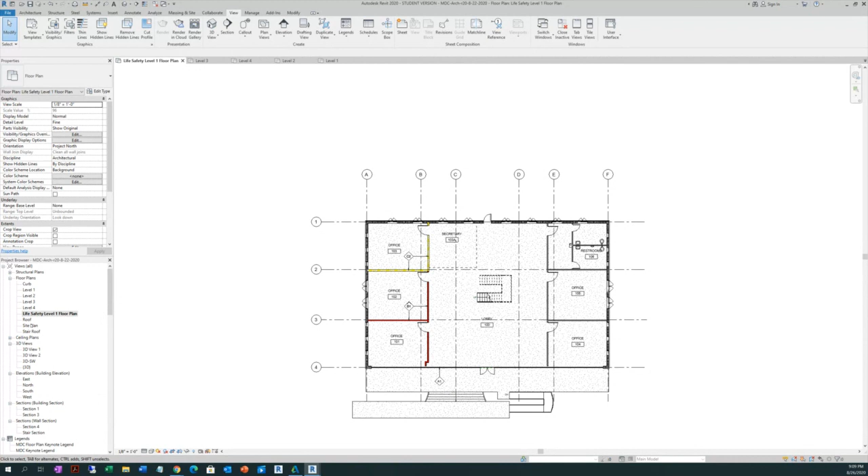Okay, so now we are going back to our site plan, correct?

Let's close the views that we don't have active. Go to the site plan, close inactive view here. Okay, close inactive view there. Now let's go to the 3D view.

Give me one second. Te voy a llevar con tu papá ya.

Okay, so we have the 3D view here, correct? Looks like the sidewalk is buried on that topo, and something here we need to manipulate as well.

There's something I need to tell you. I'm going to leave this asphalt down like this, because usually what I like to do, if it's something paved, is do my slab, then do the split region, to do whatever I need to do. Let's see if that works now.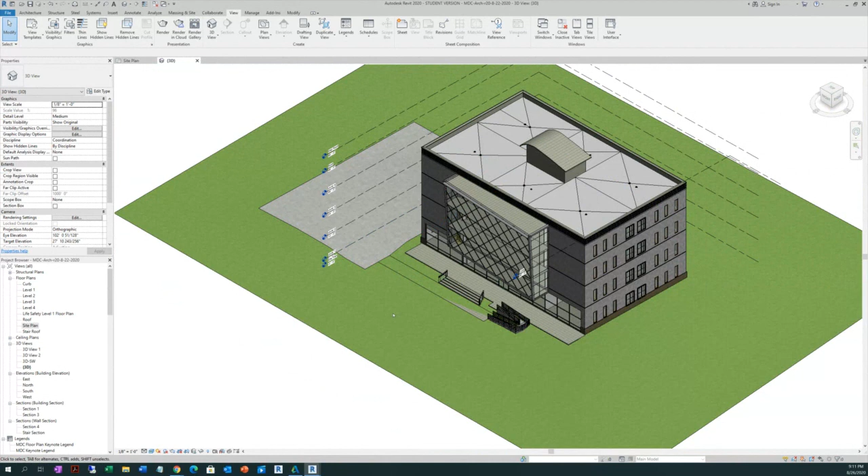If not, we do the slab. Okay, how can we approach this that we see over here as well? You select, you have the 3D and you have the site plan, and when you go to the tile views over here, go to the tile view.

Excuse me, Luz, what about if I don't have that slab? No, you can work without this, no problem.

No te preocupes. Vamos a hacer esto.

Hailey, could you please delete this as well? Hailey, delete this please. Sure. Okay, nothing happened there, Rosa.

Okay, how this was done is the split region. I'm going to explain that to you in a few moments.

Let's go take care of this. But you have this, Rosa, correct? Rosa, do you have this? No, okay, neither. But I can open the file that you send us.

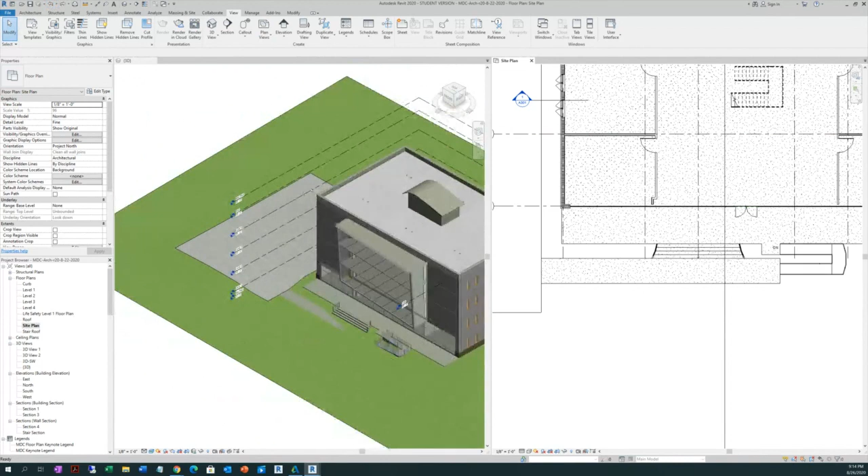You let us know, okay? Close the one you are working, Rosa. Hello?

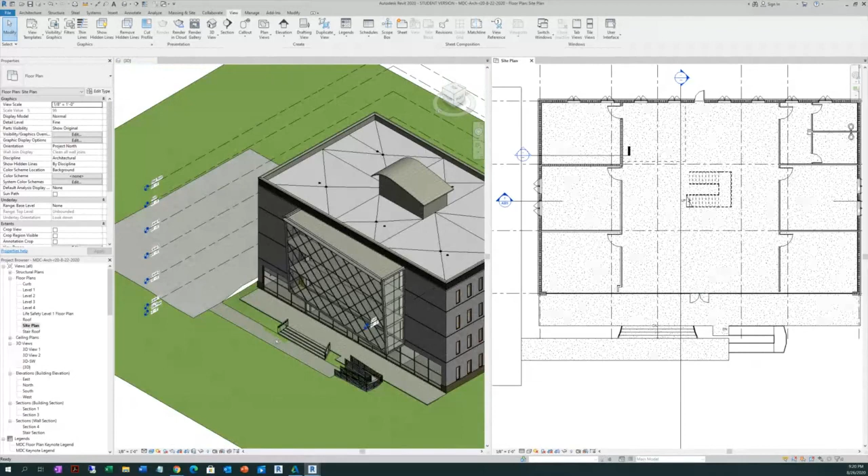Come here to the surface mode, finish mode. Still we have seen this, oh no, I think this is going to look like this at a certain point. Okay guys, it looks like this at a certain point, but I don't know if it's a matter of visualization, but let's leave it like that for now, because can you see the whole driveway without grass?

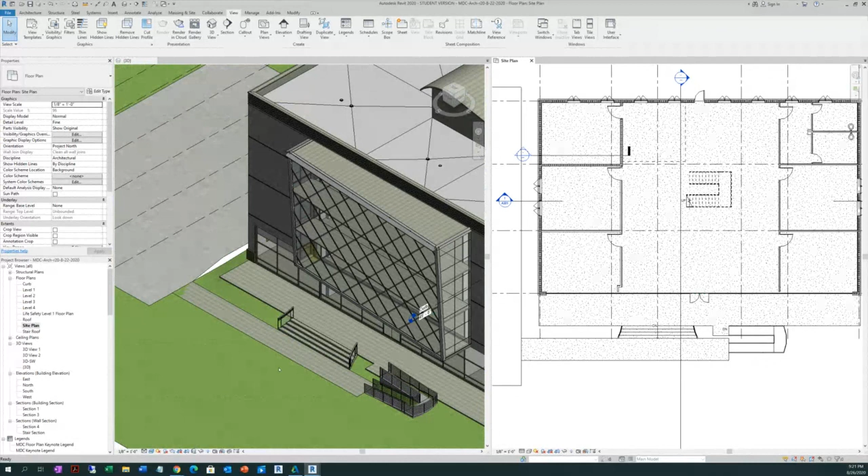Hello? I see it with grass. But if you move it... can I put it negative, no? No, always with grass. Okay, so select again the topo, and the last time, let's go see if we can select, for the last time, the surface, any surface.

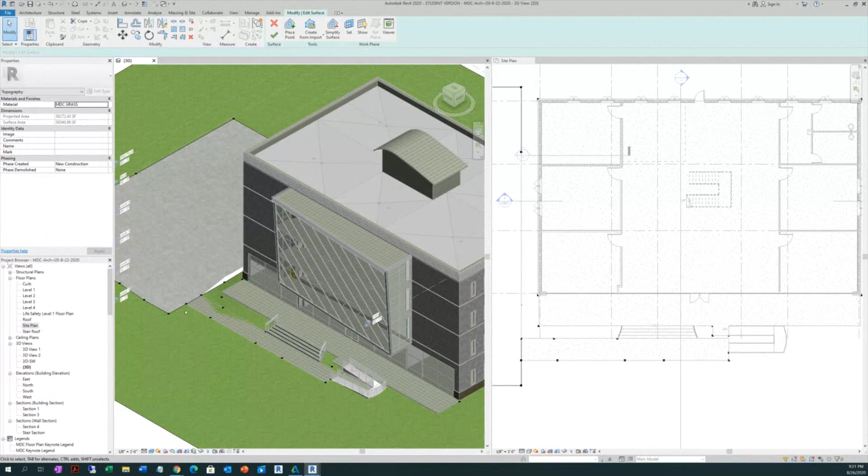Okay, then zoom in, select. If we have 210 there, 210, let's go place here 211, okay, 211. Select all these points, this point and this point on the driveway.

Let's go put, enter negative 3 feet, negative 36 inches, that's it. Negative 36 inches for all these points here. Negative 3 feet, negative 3 feet.

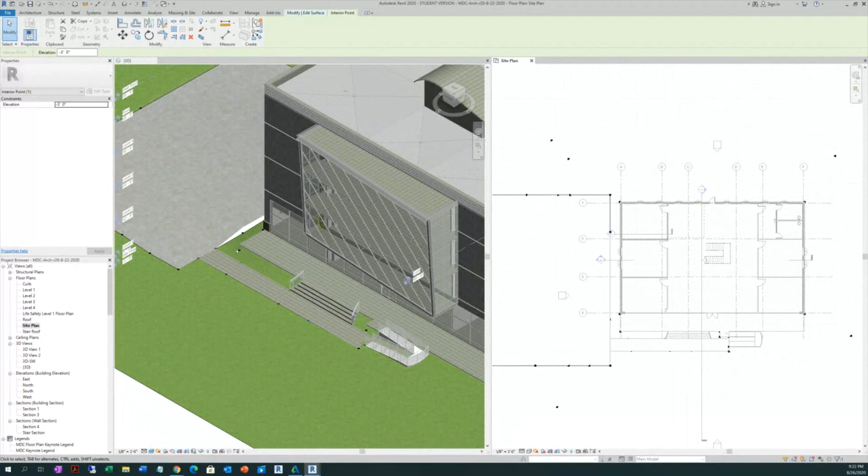This negative 3 feet as well. Then these two next to the ramp, just leave it like that. Leave this like that, 210 or whatever. But these, 3 feet, those 3 feet, okay? And then leave that one like that, and see?

Go back to the edit surface and finish mode. Save your project, and you have something like this. Correct? We need to work on this gap here. Correct? So far this is okay.

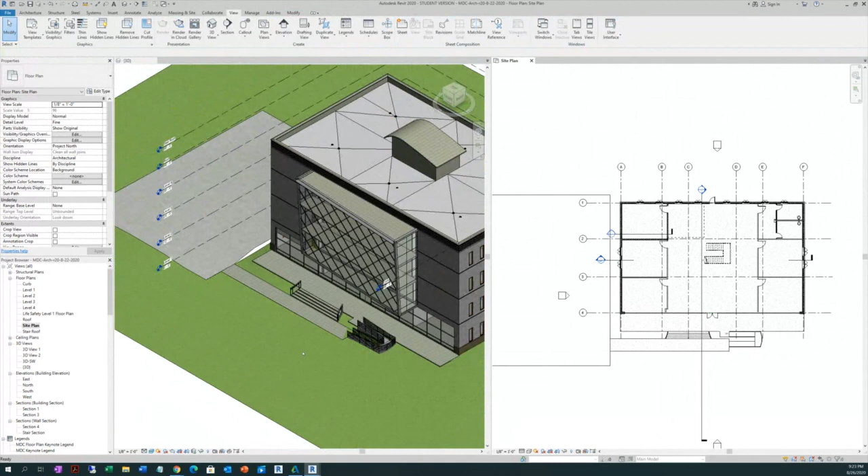Except that over here, it looks buried. We can change it, but you can do it as a practice. Now, let's go return this.

Modify. See what is the problem that we have here, that should be aligned with that. Okay, so obviously I cannot get any surface points here. Okay, or from here to modify here. See, I have these points here around my side, the asphalt.

Okay, are you like this? Oh, let me go back. Okay, I select the asphalt. I select the asphalt, correct? Select edit surface. Correct?

Let's do something, let's go cancel this. Let's go do something, let me see if we can do something here. I want you to select, I want you to go to the Massing & Site, let's go merge the surface. If I can merge this guy with this guy, let's go and see it.

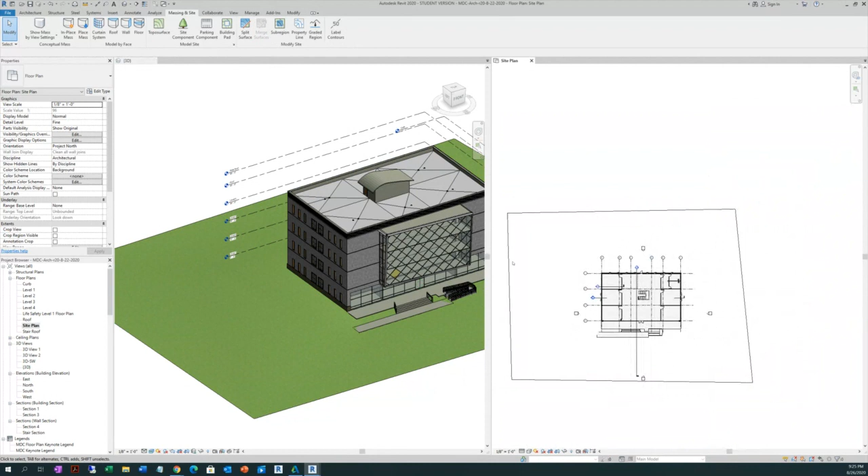Okay, now what we are going to do here on the site plan, let's go concentrate on the site plan. Imagine that you are going to have a parking spot at the sidewalk of your street, and part of the sidewalk and the street. Okay, so how can we have a reference quickly? I'm going to architectural.

I'm going to model line.

Okay, then here I'm going to select from this site plan this part over here, next to the walkway, next to the building. I'm going to click and give, let's say, 10 feet down there.

Hi Luz, I have trouble hearing you, can you repeat it? Okay, look, you go to the architectural tab, select model line, then select this point on the walkway next to your building, select that point and go down 10 feet.

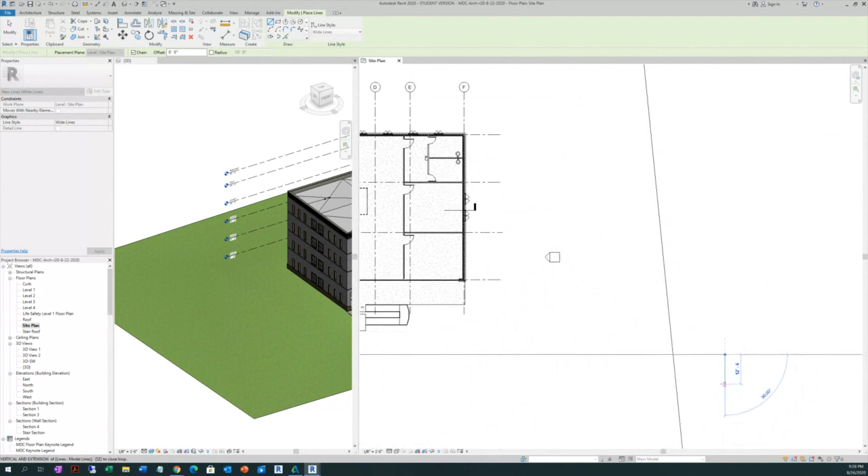Go down 5 feet, because you are going to do the sidewalk. How long was the line, mi amor? Todo lo que tú quieras que salga. Okay, esa la vamos a borrar, okay?

Then you return with that line here - vamos a decirle que te devuelvas 230 feet, correct? 230 feet. Then that's the sidewalk, and then you come here, and that's going to be another line that goes down there, because you need to have a space here for the parking space.

Okay, that is only reference for what I'm doing here. So I'm going to accommodate myself again on this part of my walkway next to my building, on the top section on the left side. Click on that endpoint, and from that endpoint go away, let's say 10 feet - write down and enter 10 feet on your keyboard.

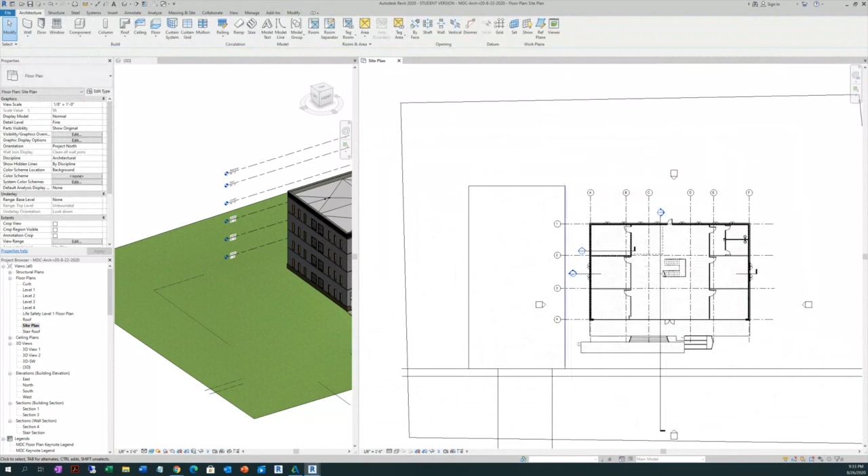Ok, sí, mira, vamos a hacer esto así. Wait, let me delete this. This is what I want - I'm going to give you the dimensions, okay? This is what I want, this is the dimensions I want. Okay, I'm going to dimension, annotate. Let me see, annotate, align.